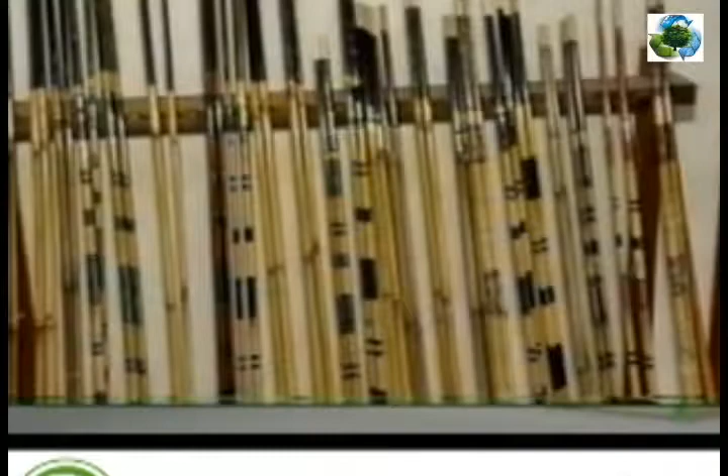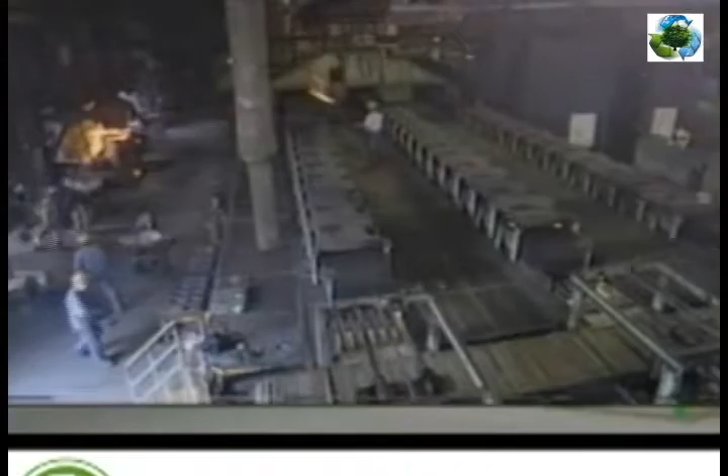Such traditional industries as foundries, tree plant nurseries and landscaping services, and making fishing poles have made Kawaguchi a well-known city since olden times. Because of the extensive foundry industry here, Kawaguchi has been known as the city of cupolas and has often appeared in movies introducing famous towns. As newcomers to the city increase, the traditional festivals and ceremonies flourish more and more.

The first festival of the year is the Hatsu-Uma Drum Festival in March. May is the season for talismans and praying for abundant crops, and a large snake is made of straw for the Jazukuri Festival. August brings the Tatara Festival, the largest festival held in the city. Then, in December, comes the Okame Festival, a year-end event much loved by the local people.

In February 2003, Skip City Center was born as a new industrial and business center. This multimedia facility has brought many changes to Kawaguchi, but the old is being carefully retained in a harmonious way, attracting people to this city of tradition and advanced technology.

However, even greater increases in population are forecast for Kawaguchi in the future, and the amount of waste generated will also continue to increase. Strenuous efforts are being made to cope with this situation. All residents wish to have a safe, pleasant, lively city in which to reside without damaging the natural beauty.

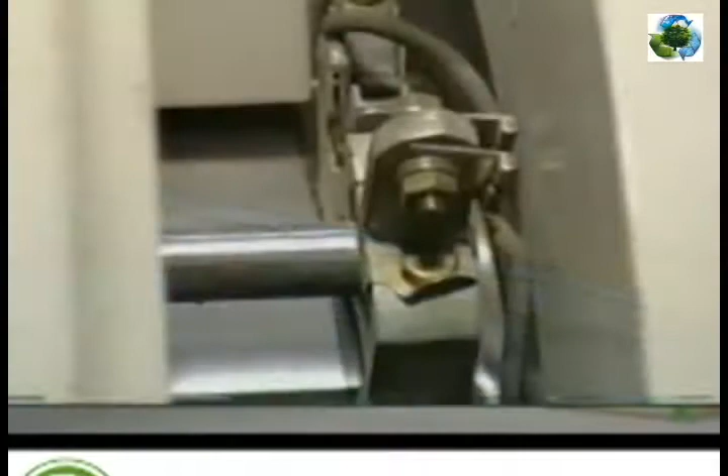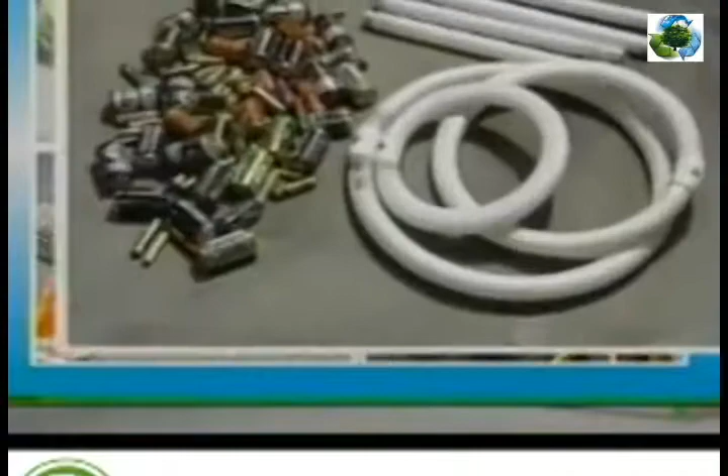Municipal solid waste is largely classified into 4 categories: paper, bottles, cans, PET containers, and similar items that can be reused; various kinds of organic waste and other unrecyclable waste; batteries, fluorescent lamps, and other hazardous wastes; and large furniture, bedding, home electric appliances, and similar items.

Inside the Asahi Clean Center are located the Recycle Plaza for processing recyclable waste and the gasification and ash melting facility to dispose of household waste.

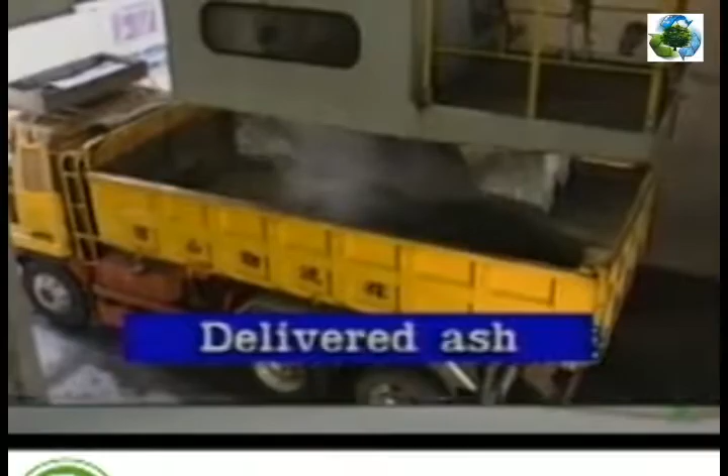This is ash that remains after household waste is incinerated at the Totsuka Clean Center and is called delivered ash. The Asahi Clean Center disposes of delivered ash. 420 tons of waste and 37 tons of delivered ash can be disposed of per day.

Now, let's take a look at the gasification and ash melting facility and various other typical facilities. The waste thermal treatment facility consists of the following 4 major areas.

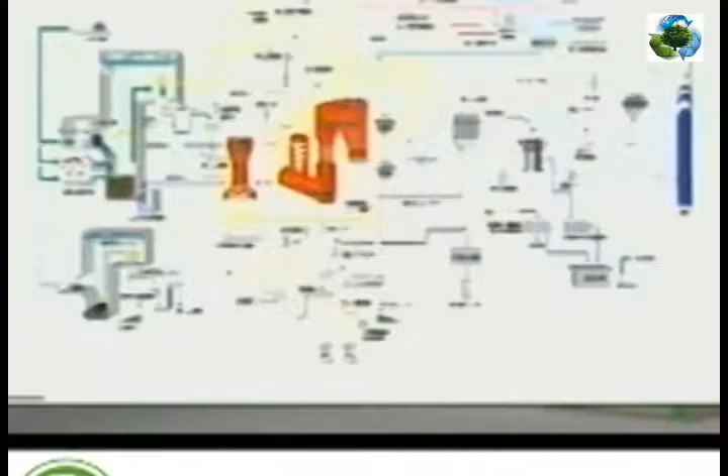First is the waste receiving and feeding facility, which receives, stores, and pulverizes waste, and feeds it with ash to the fluidized bed gasifier at a constant rate.

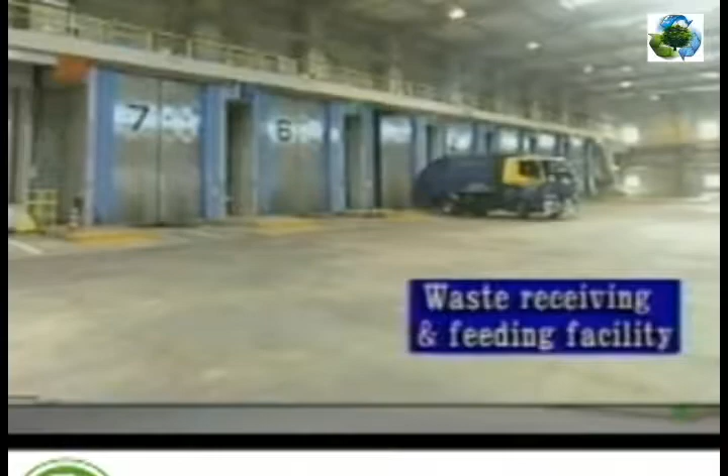Next, the gasification and ash melting facility. The gasifier converts waste into combustible gas and the gas melts fly ash.

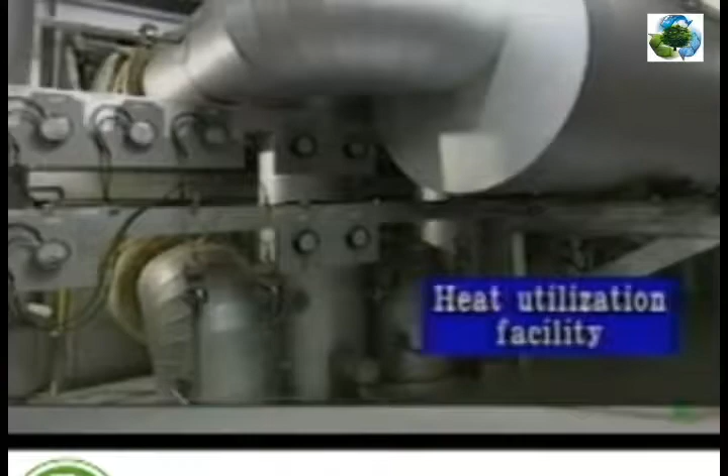Third, the heat utilization facility that recovers heat energy from flue gas, reduces emission temperature and generates steam. Finally, the flue gas treatment facility eliminates hazardous substances from the flue gas.

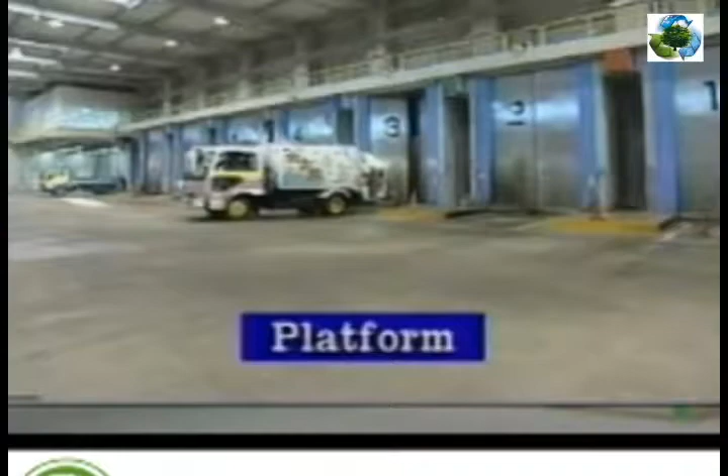Now, let's look at each facility in detail. The collected waste is weighed at the weighing shed and then loaded into the waste pit from the platform.

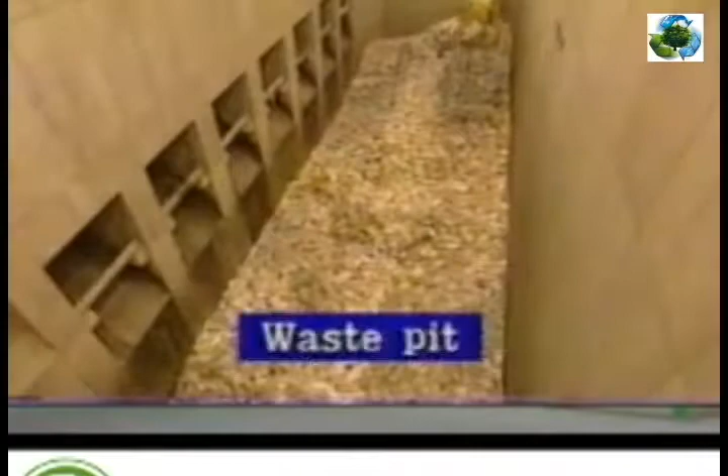Then, waste is further lifted by a crane into a waste hopper.

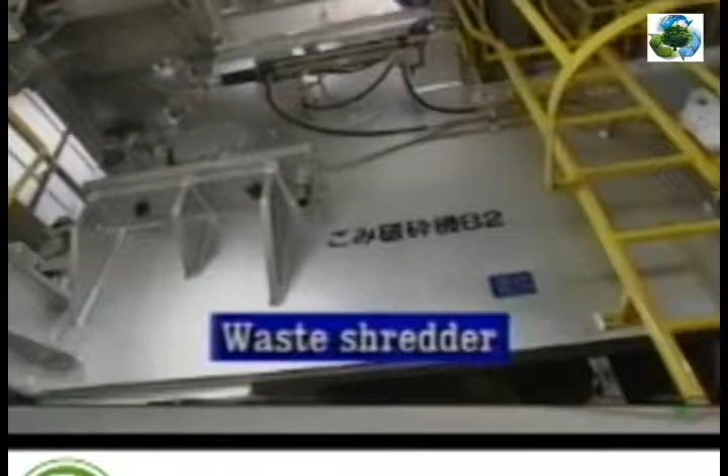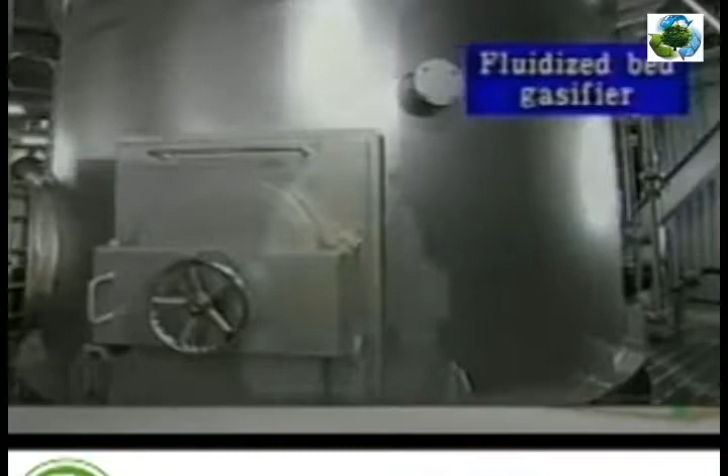Waste in the hopper is fed into the shredder where it is broken up into fine pieces, which are then mixed with delivered ash and fed by the waste feeder into the fluidized bed gasifier and ash melter at a constant rate. In the gasifier, the sand is fluidized in a vertically circulating motion with high temperature to decompose the organic substances contained in the waste.

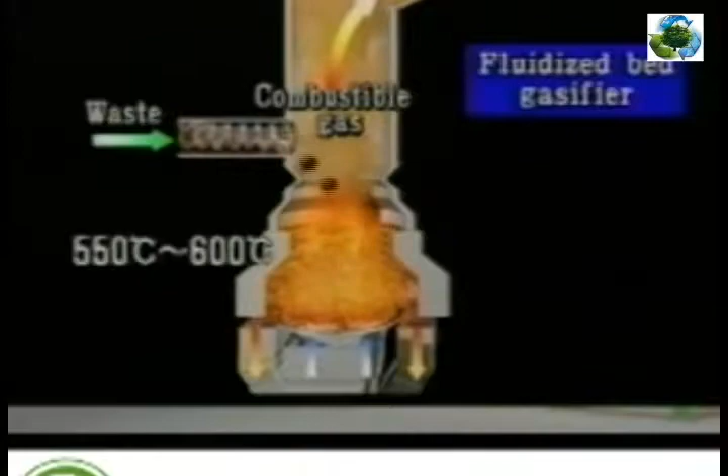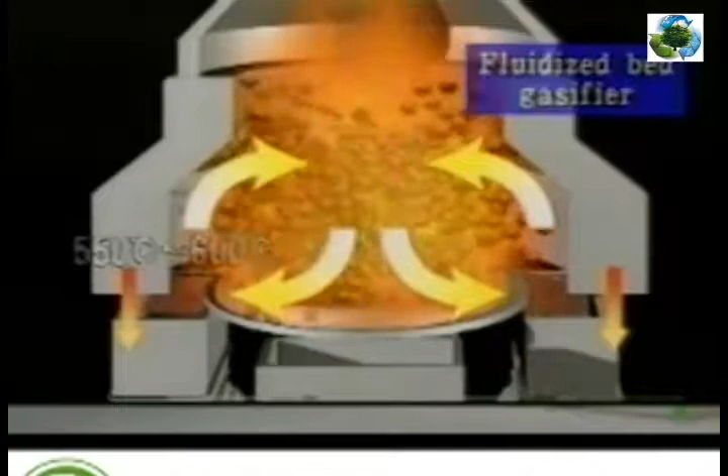Waste fed into the gasifier by the waste feeder is brought into contact with a high-temperature fluidized sand bed and is decomposed into gas, char, and other substances. The gasifier is kept at 550 to 600 degrees Celsius, which is low enough to prevent dioxin formation, and which is also below the melting point of ferrous and aluminum.

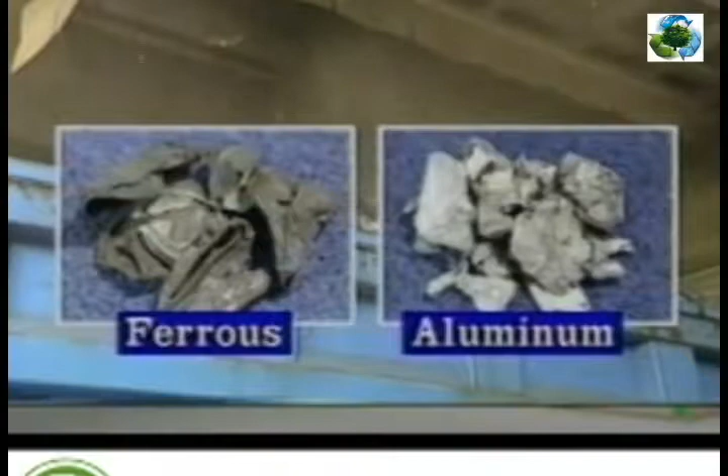The gasifier interior is maintained in a reductive and lean oxygen state. This makes it possible to recover ferrous and aluminum and other inert substances from the bottom of the gasifier without oxidation.

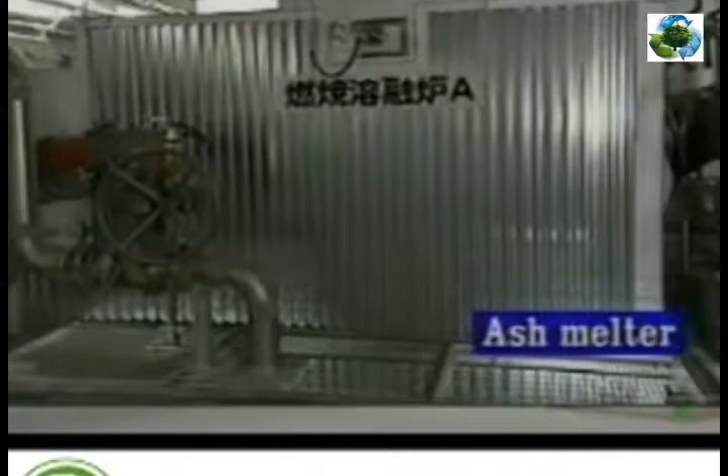The gas from the fluidized bed gasifier is led into the ash melter, where it is combusted at a low air ratio to reach temperatures as high as 1,350 degrees Celsius to melt the ash into vitreous slag. The ash melter consists of three chambers.

The primary chamber, inside which the ash entrained with gas is collected on the chamber wall by cyclonic motion. The inclined type chamber for collecting slag in the secondary chamber. And the ash melter also has a tertiary chamber for the complete combustion of gas.

Gas whirls along the ash melter wall while burning at 1,350 degrees Celsius. Ash in the gas is melted into molten slag due to the high temperature and with the centrifugal force of swirling gas. The slag then runs down the wall of the ash melter.

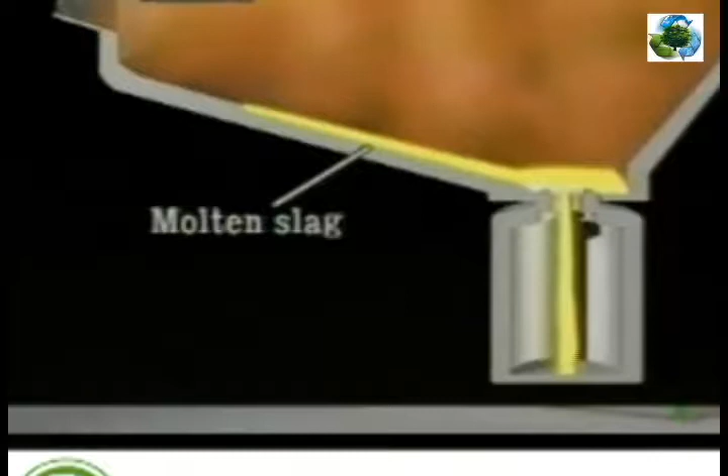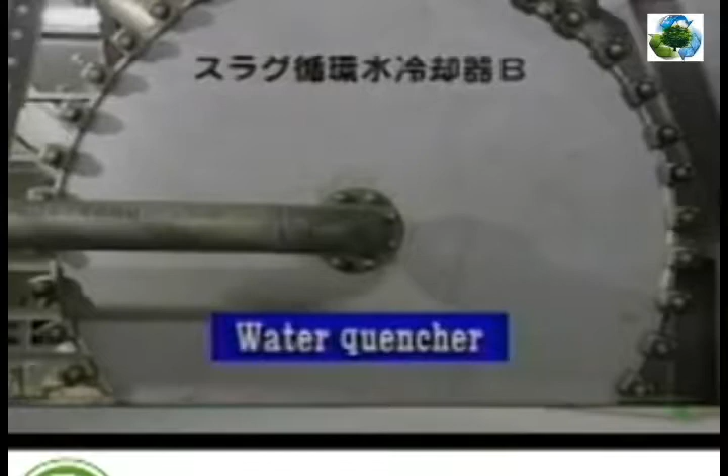Molten slag is quenched by water and air through the granulation trough and the slag conveyor, and is pulverized and collected through the slag grain size controller.

The recovered slag can be used as a substitute for sand as a sub-base coarse material for road construction. At the Asahi Clean Center, slag-made bricks, tiles, and interlocking blocks are used for flower beds, stairways, and sidewalks.

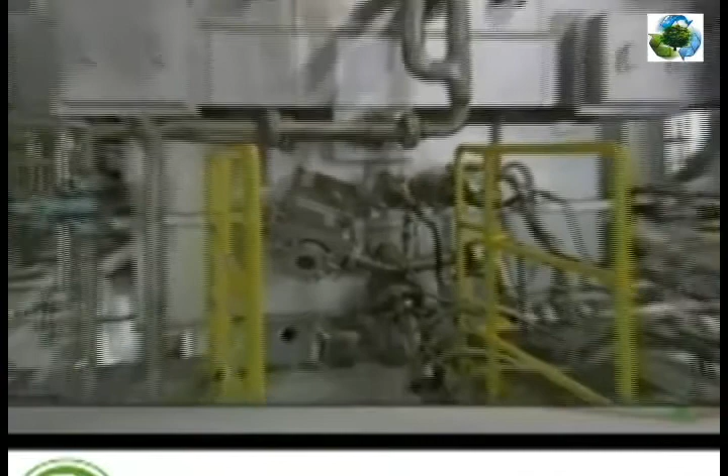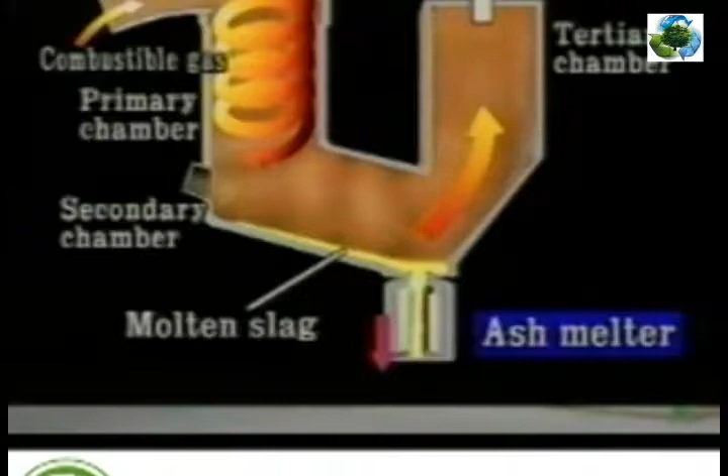The gas, stripped of slag, is completely combusted at 1,350 degrees Celsius. The waste heat boiler effectively recovers heat energy involved in the flue gas and utilizes the heat to generate steam. The temperature of the flue gas at the inlet of the waste heat boiler is higher than 1,200 degrees Celsius.

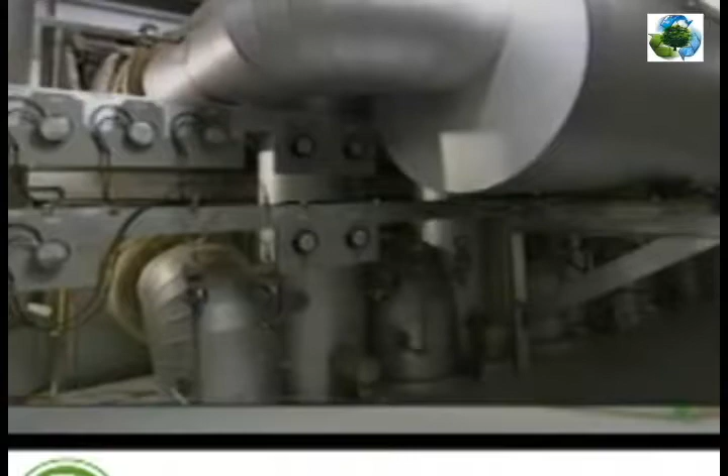The generated steam is utilized for the center steam turbine to generate electricity. The electricity reaches a maximum of 12,000 kilowatts, enough for consumption in the entire center. Surplus electricity is sold to electric power companies.

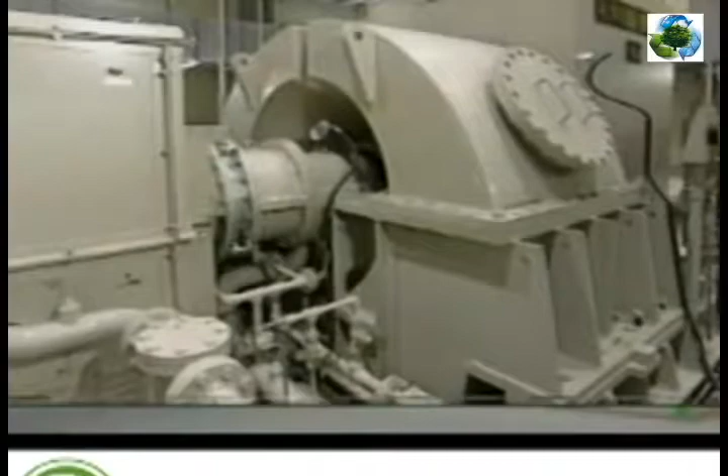The flue gas is sent to the treatment facility for removal of pollutants. The steam is also used for water boilers to feed hot water throughout the center.

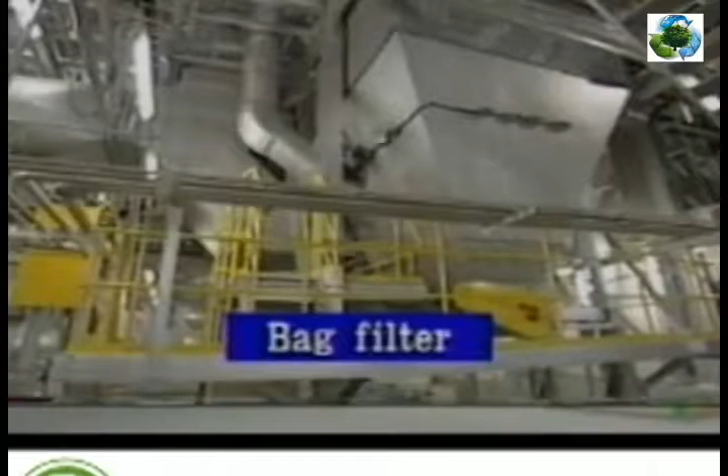The bag filter collects dust in the flue gas.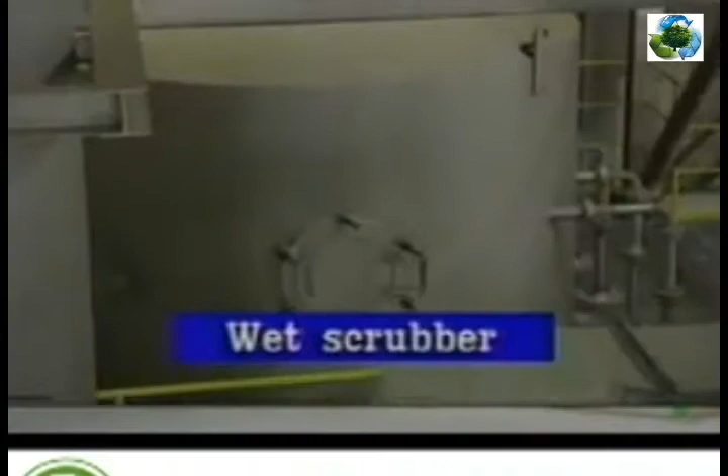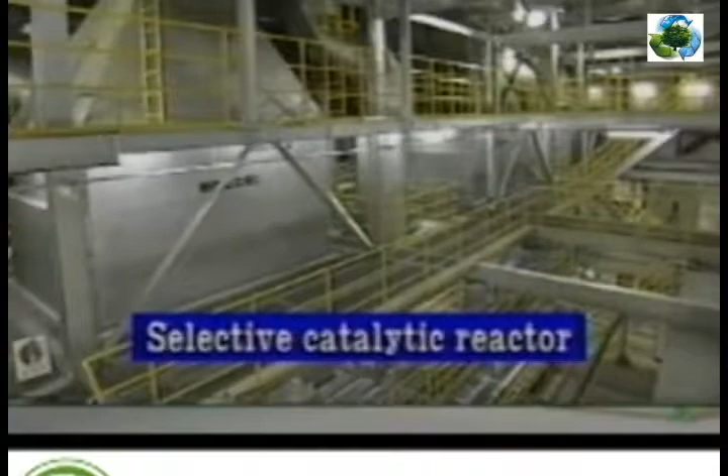The flue gas is scrubbed with a solution of caustic soda to remove sulfur oxides and hydrogen chloride. Then, the flue gas enters the catalytic reaction column where nitrogen oxides are reduced to nitrogen by ammonia.

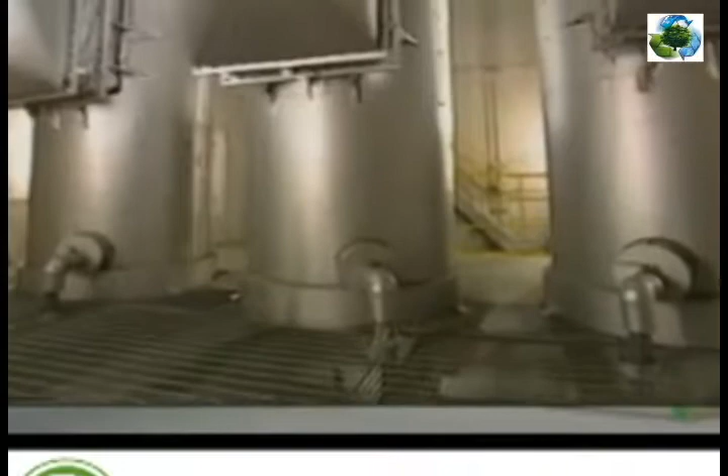The pollutants contained in the flue gas are removed to a level below the limit specified by the emission guidelines and can be released safely into the atmosphere from a 100-meter stack.

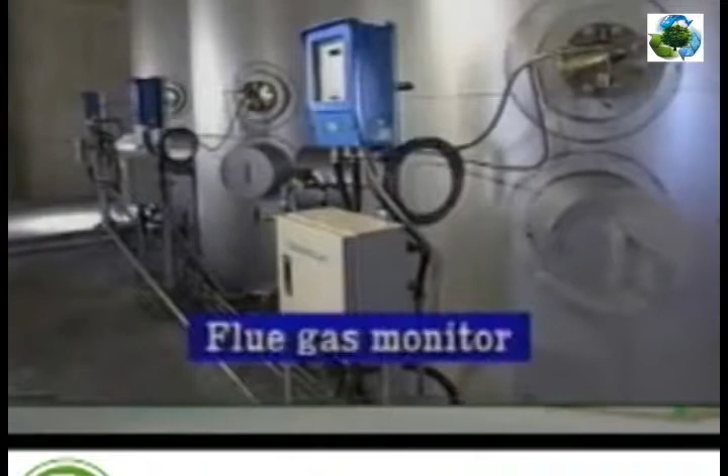The emissions are under the continuous watch of a flue gas monitor installed in the stack. The quality of emissions monitored is indicated on the emission quality display at the entrance of the recycle plaza.

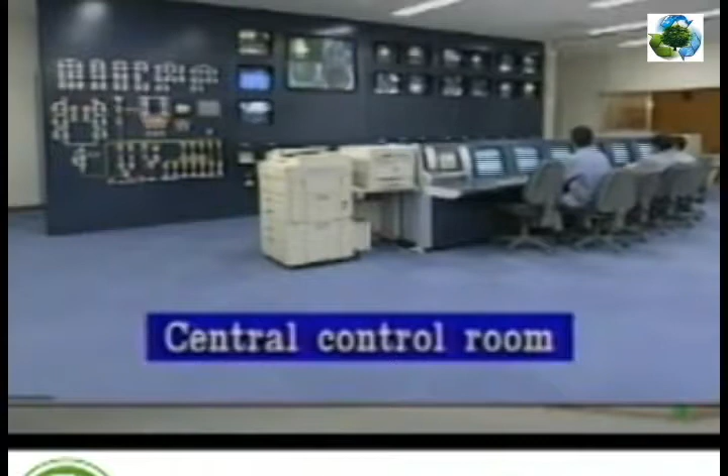The representative installations of the Asahi Clean Center just mentioned are put under the control of the central control room. Signals from cameras and measuring instruments are all gathered here.

Let's review the major merits and the latest technology of the Asahi Clean Center's gasification and ash melting facility.

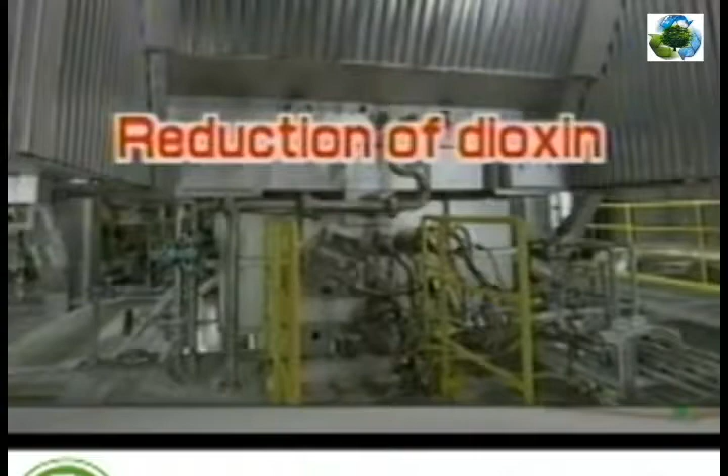The high temperature treatment dramatically reduces dioxin. Ferrous and aluminum are recovered in a non-oxidized state suitable for reuse. By reducing air ratio, the flue gas volume is reduced to minimize environmental loads.

Fly ash is melted and becomes slag by the heat energy contained in the waste. The recovered slag is used as a material for sidewalk blocks and other like products.

Unsorted waste is a nuisance, but when it is sorted properly, as shown here, recycling becomes possible and it becomes a resource.

It is very important, of course, to sort waste properly, but the most important thing is to reduce the amount of waste generated as much as possible by creative thinking and effort.

The daily average discharge of waste per person is about 1 kilogram. Soon, the population of Kawaguchi City will reach 500,000. This means that 500 tons of waste will be generated every day.

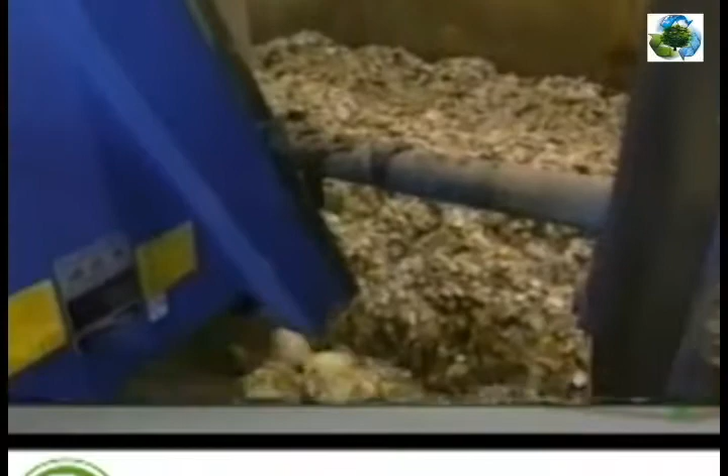Waste disposal is a costly business. The Kawaguchi municipal government is attempting to decrease the amount of waste generated by 100 grams per person per day through the cooperation of all residents.

If this can be achieved, it would result in reducing the amount of waste that must be disposed of by 18,000 tons a year. The Kawaguchi municipal government is striving to create a city filled with greenery and provide a pleasant living environment. If each and every citizen cooperates in reducing waste, the result will contribute significantly to the city's efforts to build a more comfortable place to live for all residents.